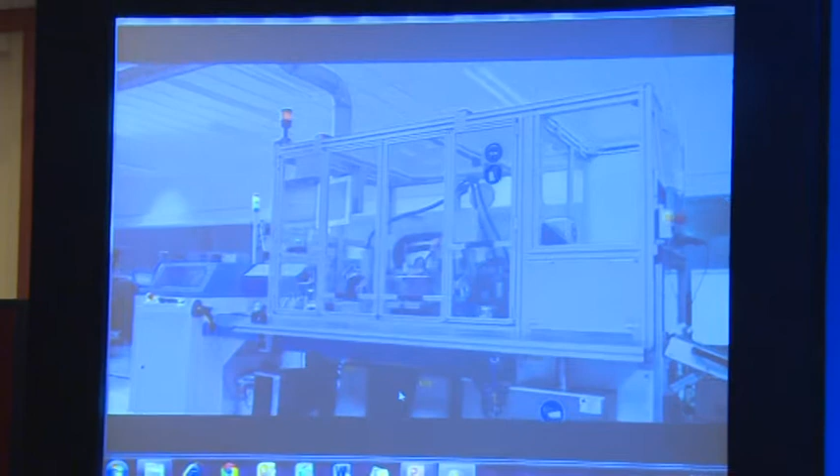The first steps towards Industry 4.0 have already become reality. It all starts when mass production components become a unique item, with their purpose predefined at the outset, because even before manufacturing, the component exists in virtual reality, including all the information required for its production.

But all the other necessary components also have to be mapped into the virtual world. They also get names and addresses and thus an identity, so that they know where and when they are needed in a production line or process.

Equipped in this way, they are able to negotiate their way through the digital factory for kilometers before reaching their destination.

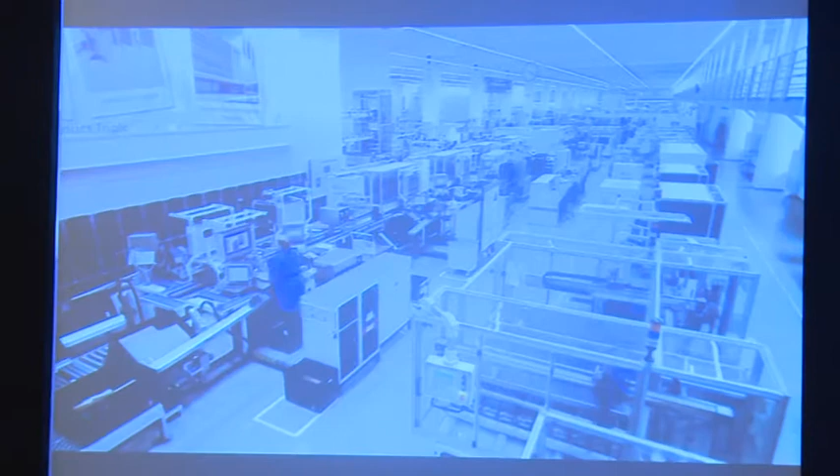Arriving at the processing station, the workpiece is identified and the machine calls up in real time all information needed for processing.

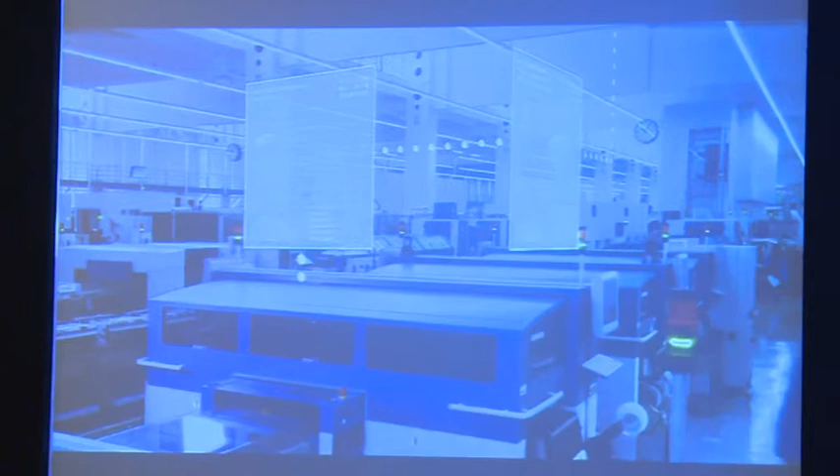After each station, the work gets checked automatically, either optically or by using other measurements. Deviations from target specifications can thereby be discovered on the spot, and faults can be eliminated quickly.

If a machine needs replenishment or maintenance, it issues an appropriate request before shortages or breakdowns are experienced. The amount of resources used is immediately recorded in the system and stocks get updated.

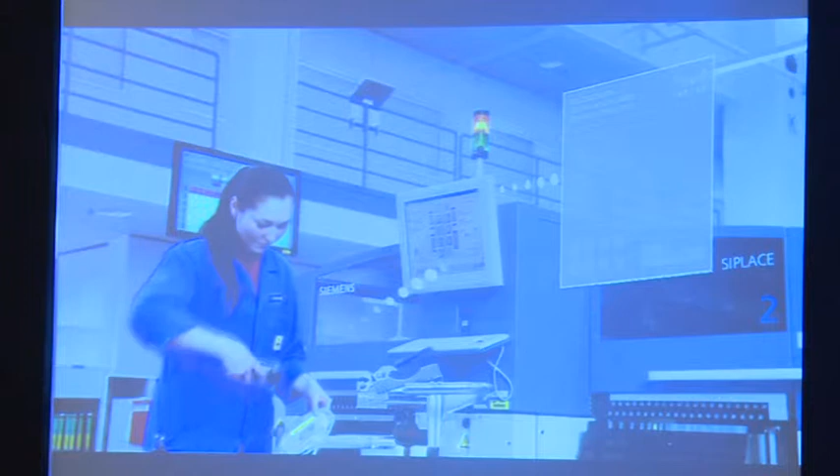During processing, all relevant data for the product is stored in its own digital product memory. This means that every stage of production can be traced precisely.

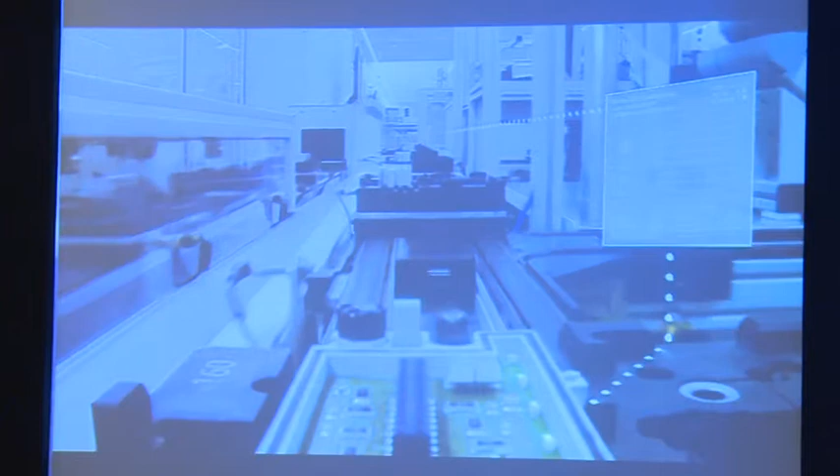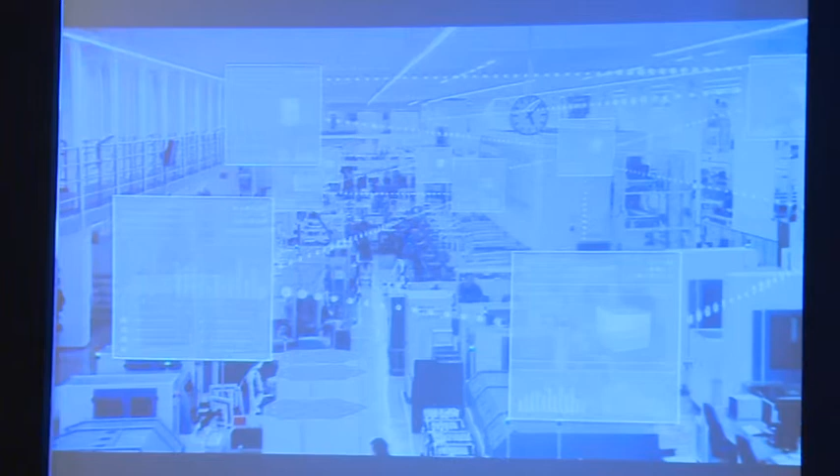In the factory of the future, machines and workpieces will even communicate directly with each other and make autonomous decisions about the next production step, comprising a system that is decentralized, efficient, and flexible. For this, so-called cyber-physical systems are the key enabling technology.

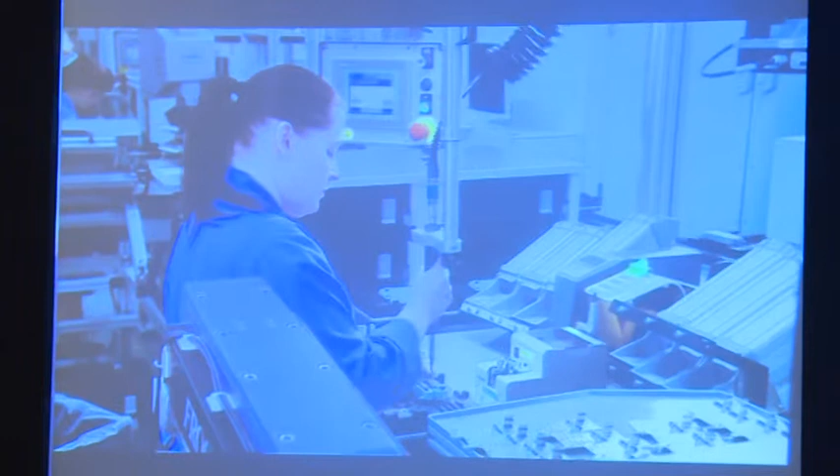But for all this technology, humans are still crucial. Even in a highly automated production environment, creativity, experience, and the ability to assess and evaluate situations remain irreplaceable. Though technology can provide valuable support, the operator safely controls innovative products.

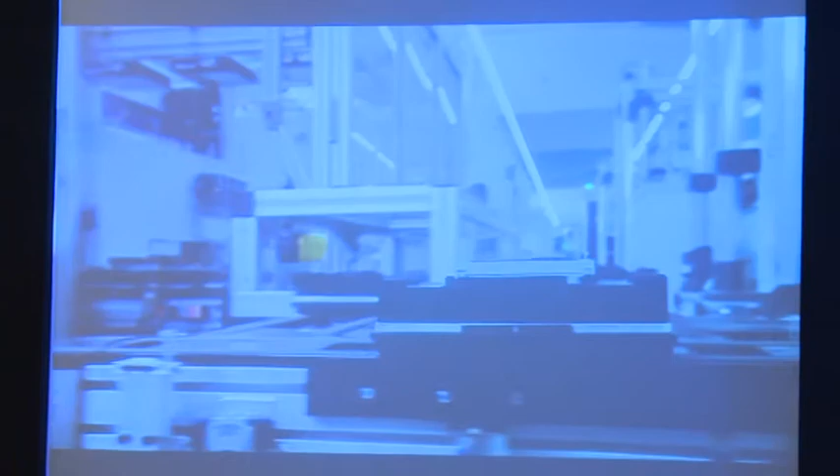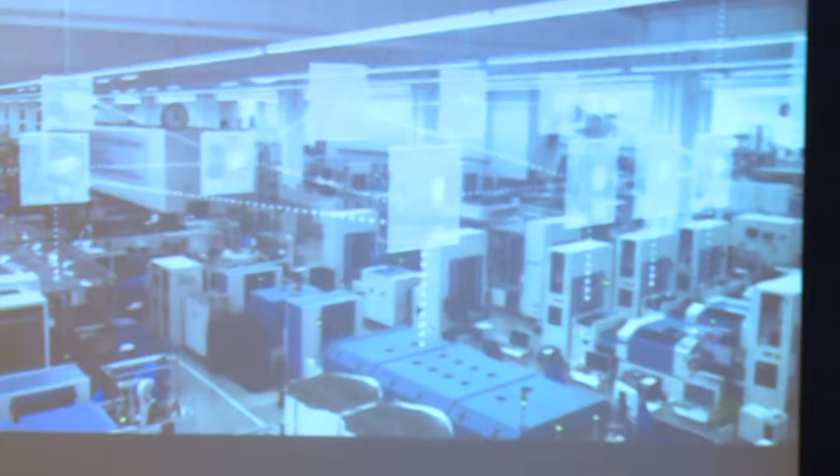Some important questions need to be resolved before factories become truly smart, including topics such as standardization and IT security. Yet the opportunities provided by Industry 4.0 are enormous. Productivity can be increased by up to 30%, and both the quality and diversity of products will significantly rise. At the same time, the period between development and production will shorten. Thus, Industry 4.0 will make a decisive contribution towards maintaining and improving Germany's competitiveness as an industrial location center.

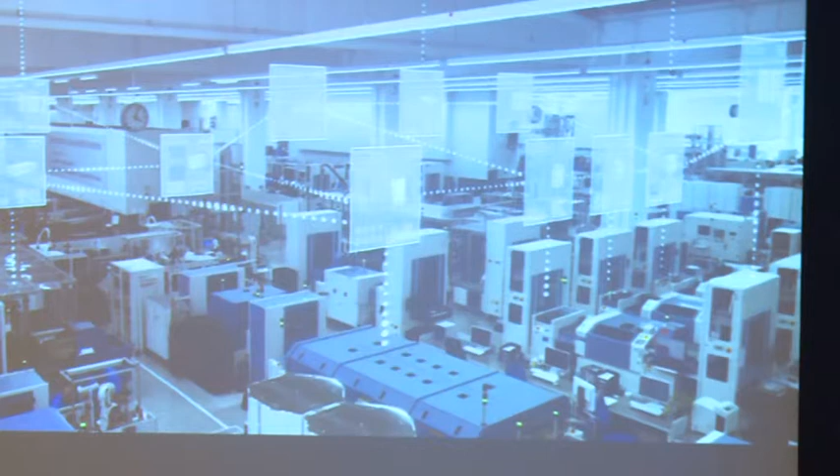Can I go back to the presentation? So you can see this is actually the Siemens factory in Germany, which is already a living example of some of the key steps which have been taken already for moving towards Industry 4.0.

Industry 4.0 is actually an evolution of the whole technology area, and I will go through my slides to show you what exactly is present today, what is the reality as of now, and what future developments will happen in this area for finally achieving improvement in productivity.

How did this Industry 4.0 terminology come in? It is just actually one of the visions of the future of manufacturing coming primarily from Germany. But you have similar schemes and initiatives also from other countries, like the US has the manufacturing renaissance as one of the initiatives which is moving towards achieving the same end, that is, the future of manufacturing and achieving more productivity.

What is important to note is that governments the world over, trade associations, and corporations have realized this, and also realize the significance of creating their own value add.

And this is the key factor. The value add is very important, and that has to be optimized further at each and every step of the production process, and that is what all are moving towards.

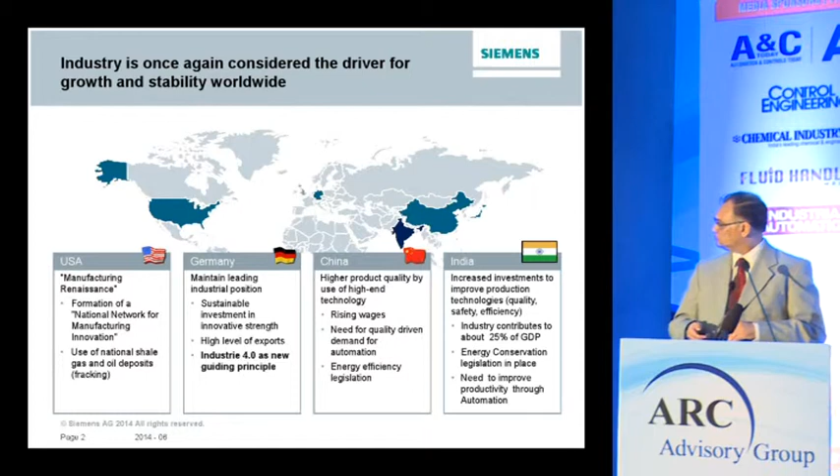Commercial enterprises face major challenges the world over. We all know that they need to increase their efficiency, reduce time to market, and improve their flexibility. When you talk about efficiency, basically energy and resource efficiency are today the key parameters which they would want to work on. Reduce time to market by introducing new products faster, which means you need a shorter innovation cycle, also characterized by handling large data volumes across the whole chain.

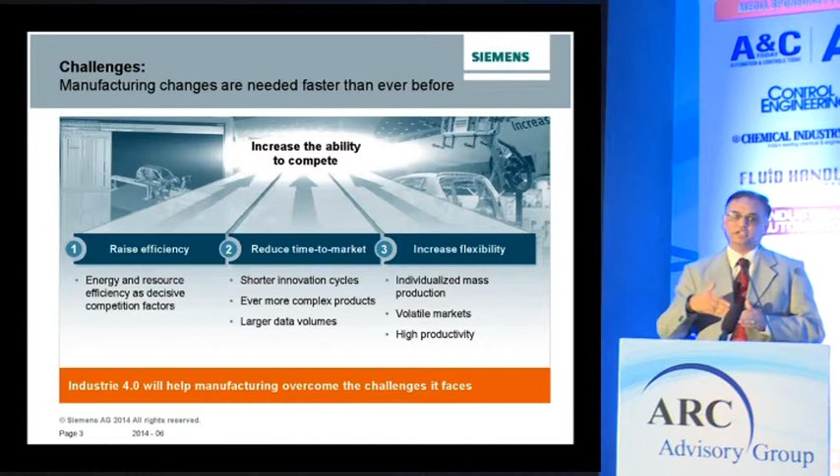And also we need flexibility. Individualized mass production is one of the characteristics toward which the manufacturing industry has to move, while simultaneously taking care of the volatility in the market. So all these challenges which the industry faces, we feel that Industry 4.0 should be able to overcome over a period of time. Let's see how.

Following the introduction of electronics and IT to increase the degree of automation in the 60s, further enhancements were primarily done in productivity by integrating the product development process and now the production life cycle management. The key, what Siemens feels, is the seamless integration of the product life cycle and the production life cycle, and this is where the movement or the development is happening towards.

And we have seen the benefits of this in some subsequent examples we will show in the automotive industry, of how the improvement in productivity has happened by having this basic thing done. But it is not easy to do. There's a lot of work which has to go beyond the seamless integration of this data, and I'll tell you exactly how we went about it in the subsequent slides.

But an important feature of Industry 4.0 is that it offers a unique introduction to the world of cyber physical systems. Now this is a new terminology which, at least when I got involved in this, I heard for the first time. The cyber physical system forms the basis of Industry 4.0.

It is characterized, as you can see there, by everything being connected with the aid of sensors and RFID chips. That means the products which are to be manufactured, the transport systems involved in manufacturing, and the tools involved will be communicating with each other in an organized manner, finally to achieve better productivity or overall production improvement.

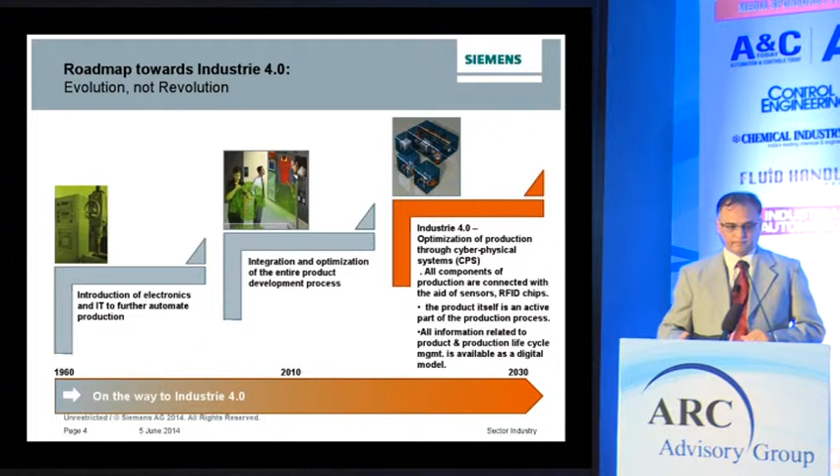So let us get into what we see as the Siemens way of moving towards Industry 4.0. Broadly, you can define a typical manufacturing or production process into product design, planning, engineering, execution, and services. The need of the hour is to get substantial improvement in productivity by integrating all these stages of the value chain through a seamless data connection. For this, we need very strong industrial software and a lot of investment in developing a common platform across these software networks. This has been the basis of what Siemens has moved towards and done very effectively.

That means for each product, alongside its physical depiction, we need a digital depiction also available for the complete life cycle. That means you need a digital model, which is also a prerequisite when you move towards the cyber-physical system in the future. So the founding blocks have already been put in place by having this integrated, seamless data connectivity. The digital model of the whole value chain is in development and already in progress at many stages in many industries. Once the cyber-physical part is also developed in the later years, this will give a complete picture of how overall productivity improves.

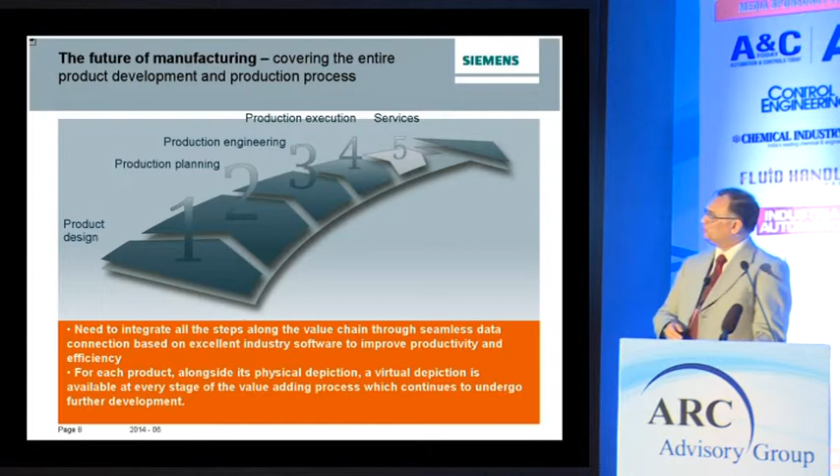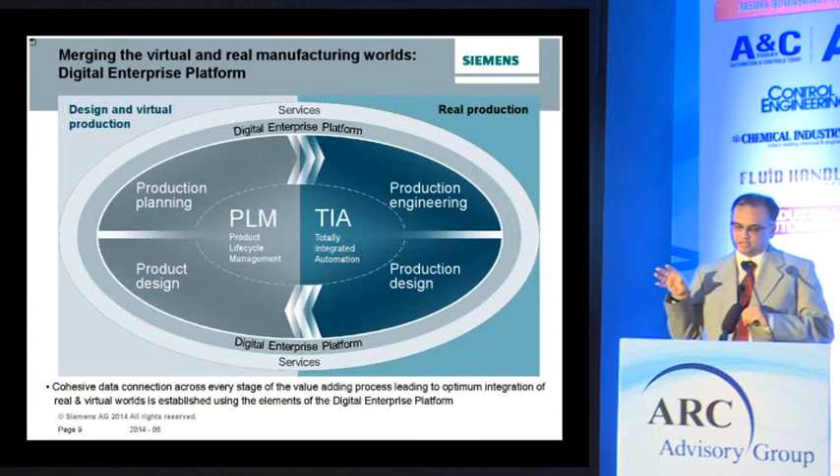So what we have come out with is what we call the digital enterprise platform. This is basically a cohesive data connection across every stage of the value-adding process, meaning integration of the real and virtual world. This is what Siemens has been propagating as part of their digital enterprise platform. Siemens started work on this platform from 2007 onwards, and we are already placing the product development process and the production process on a common database platform. In the subsequent slide, you will see how we have been able to do that.

The advantage we have seen here is that if you look at PDM, product data management, and product lifecycle management, these were always various silos or products available in their own respective areas. We have integrated that along with the production process. We already see those who have been early adopters using it in their industry, basically the automotive industry in Germany, where we have references showing the benefits coming out of this. With this seamless data integration, we see a good improvement in productivity by integrating the production and product life cycles in totality.

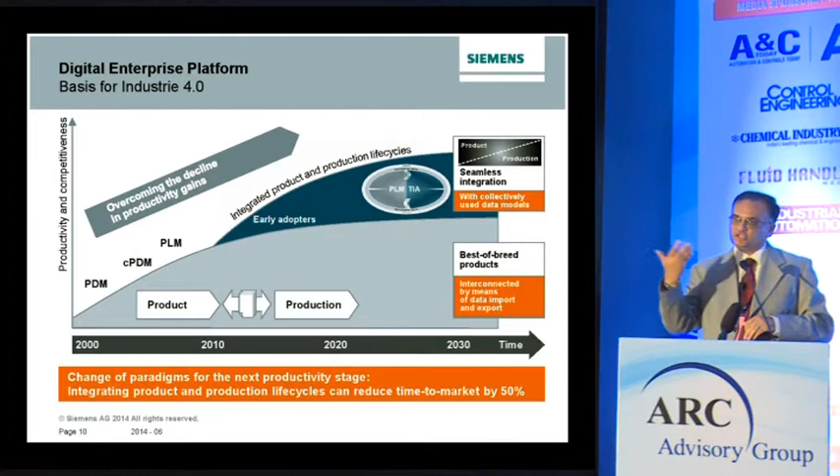It also means we are not talking about data connectivity in any typical form, like a data export or import functionality. We are talking about real seamless integration, a common database running across the complete plant. The advantage is that if you have to make a change in the product, or add a new product to your portfolio, you can do it in the digital world very fast, and because the digital model is available, this can easily be reflected in the physical world too, fast. This gives you the advantage of a flexible line with shorter time to market, and all these benefits can be seen accordingly. So what we have done exactly is shown here.

To give an example, the totally integrated automation, which is what the world of PLCs and HMIs are familiar with, and the PLM cycle on product design and production planning—we already have a lot of development done so that whatever is developed in the PLM cycle can easily be integrated into the PLC programs. We've gone to that extent. It's still under development, but in the factory shown in the movie, it's already in operation. Those in Germany later in the year, we can arrange a visit to our Amberg factory so you can see to what level the digital factory concept has been working.

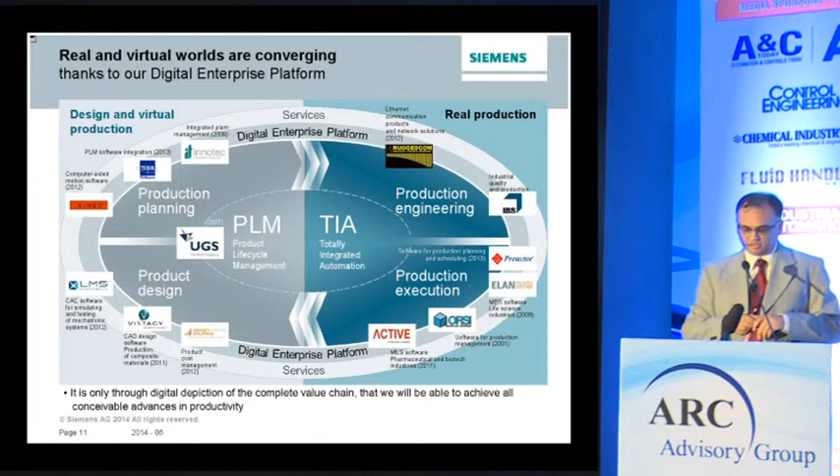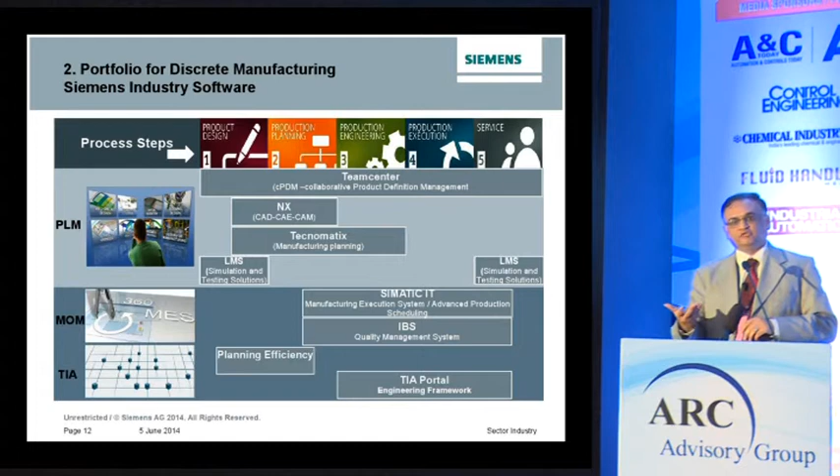Just to give a further illustration of our portfolio for discrete manufacturing—this is available as a complete database. This depicts that a complete common database is available across the entire value chain. All five sections of the manufacturing process have Teamcenter, NX, Tecnomatix, and the SIMATIC IT all integrated on a common platform, and this gives you the benefit of productivity improvement.

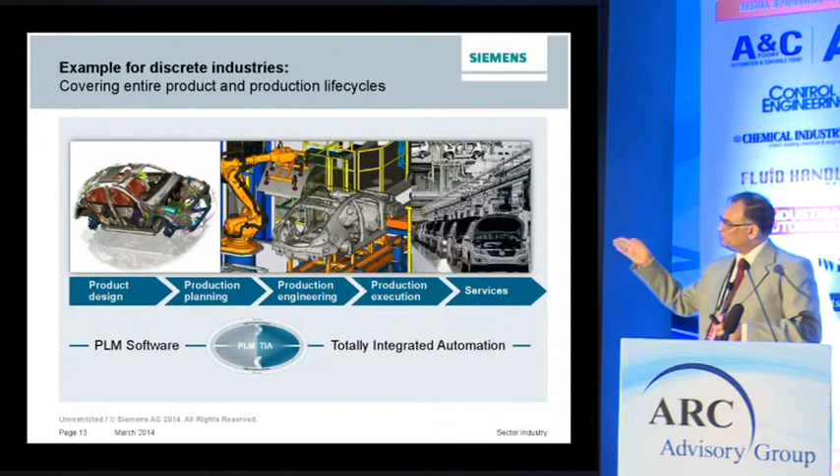Now let's take an example of a reference where we've done this successfully. As usual, I always tell our German colleagues that most of the new things we do come in from Germany, and that happens to be the automotive industry, because Siemens and the automotive industry have a lot in common. So this complete integrated approach is also done in the automotive industry as one of the key references, and BMW is one of them.

The plant in China has already implemented this to a large extent. I'm not saying it's at the full level of what Industry 4.0 expects, but to the extent of the digital enterprise platform—that is, seamless integration of the PLM and the production life cycle—it has been implemented here, and you can see the benefits. A common production line at BMW can now be used to produce many more models of cars on the same production line.

Coming to that, even the factory shown in the film has around more than 1,000 product variations on the same production line at the Amberg factory of Siemens. This is all possible because it ensures overall manufacturing time improves while having flexibility for variations in product cycles or the products themselves. The digital model forms the basis, and integration to the physical world ensures you achieve that productivity. This has also helped achieve low downtimes in high quality areas.

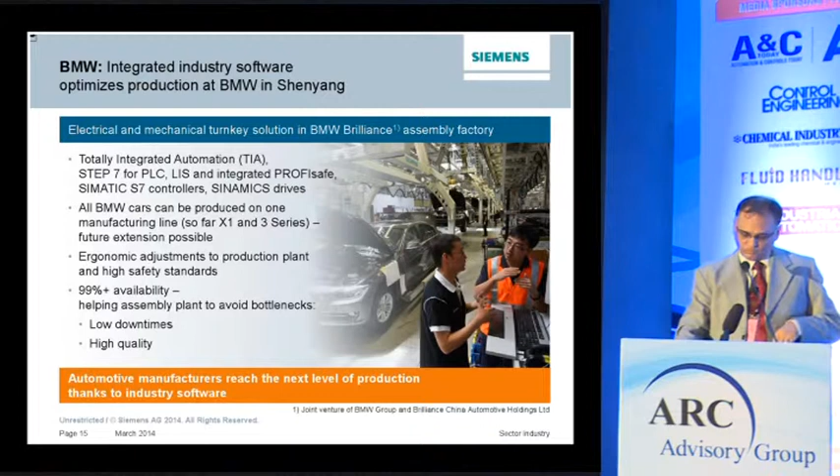But there is still a lot to be done to achieve Industry 4.0. What Siemens has been doing is only the building block, the starting point or prerequisite to move towards Industry 4.0. What still needs to be done—and this is being handled by the working groups I mentioned—is to work on machine and product exchange of information and instructions in real time, autonomous control and optimization. These areas will take a long time to develop; it won't be easy. But the basic foundation of the digital enterprise platform is already showing good improvements and benefits to customers who have started adopting it.

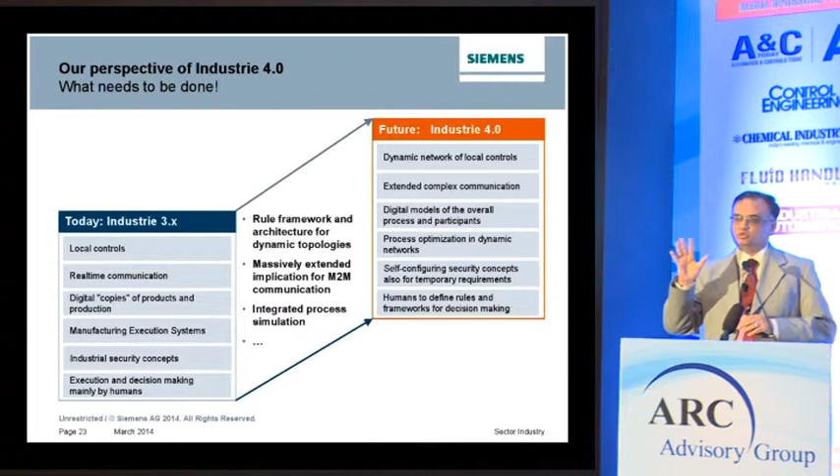So in a nutshell, here's what further needs to be done: the rule framework and architecture for dynamic topology still have to be developed. Machine-to-machine communication has to be hugely extended. Integrated process simulation needs to be done. But I can assure you, all of these have very strong working groups working behind them, in Germany and other parts of the world, and I'm sure that by 2020 or 2025 we should have a lot more to hear on this.

So this is all from my side. Because the digital enterprise platform is already in place and showing benefits, I feel the basic building block is already established. And as we move towards Industry 4.0, we would be well poised to address the needs of the industry in the future. Thank you.